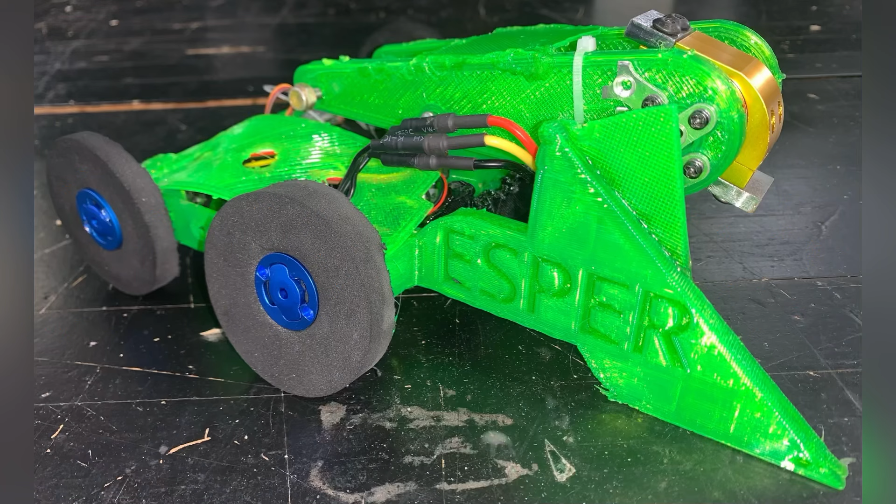Welcome to another episode of The Build Process, a series where I show you my process for building a combat robot from beginning to end. Today, we'll be rebuilding Esper, my 4-bar vertical spinner. Even though I've been building robots since 2018, Esper was my first time ever building a vertical spinner.

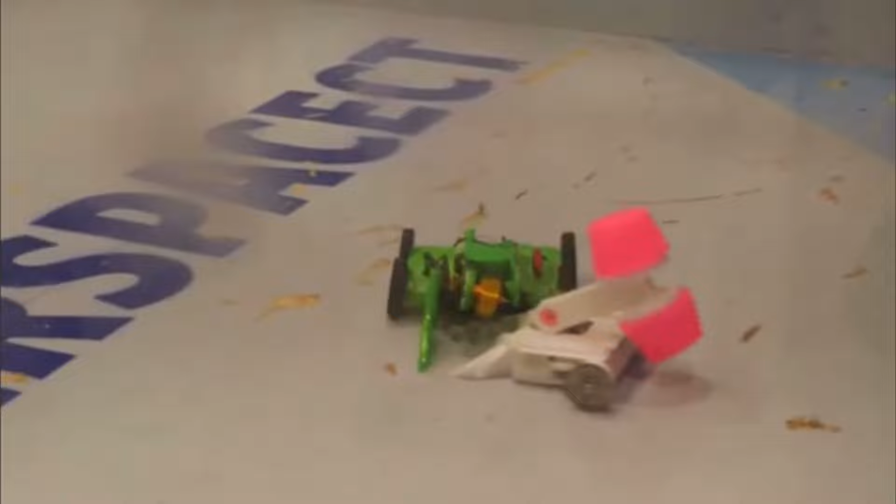For a long time, I actually avoided making vertical spinners because I was always more interested in making unique designs that went against the meta. However, after making so many other kinds of bots, I decided I was finally willing to make a vert as long as I could find a way to make it unique and stand out in comparison to other verts. And that's when I got the idea to put the vertical spinner on a 4-bar mechanism. I mostly did this because 4-bar lifters are one of my favorite types of robots, and I've also always been a fan of spinners that have their weapons on articulated arms.

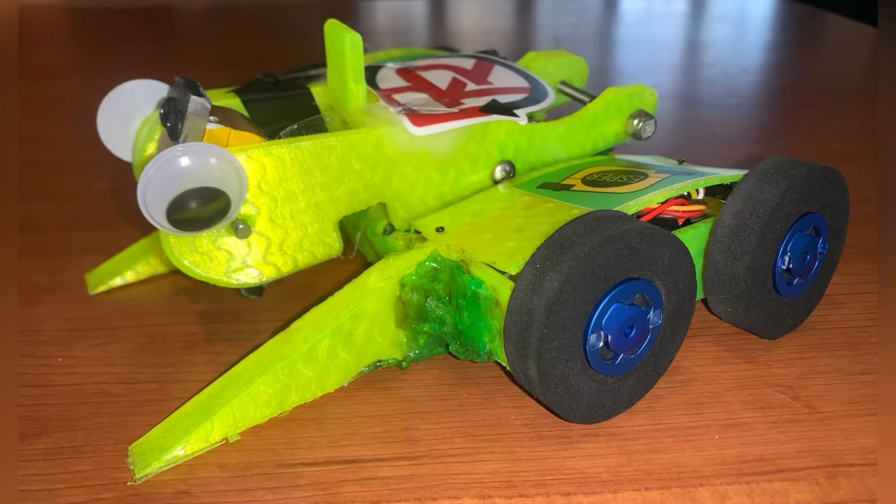Esper has competed at 2 competitions, but it's never really done that well and only has 1 win to its name. The first time Esper competed, it was held back by several design flaws, and the second time it competed, it ran into major problems with the electronics. Needless to say, there is a lot of room for improvement with Esper, and I really want to do everything I can to have this bot live up to its potential. Esper will be competing in T-Town Beatdown on August 3rd, and so it's time to redesign Esper so that it can be the best bot it can be.

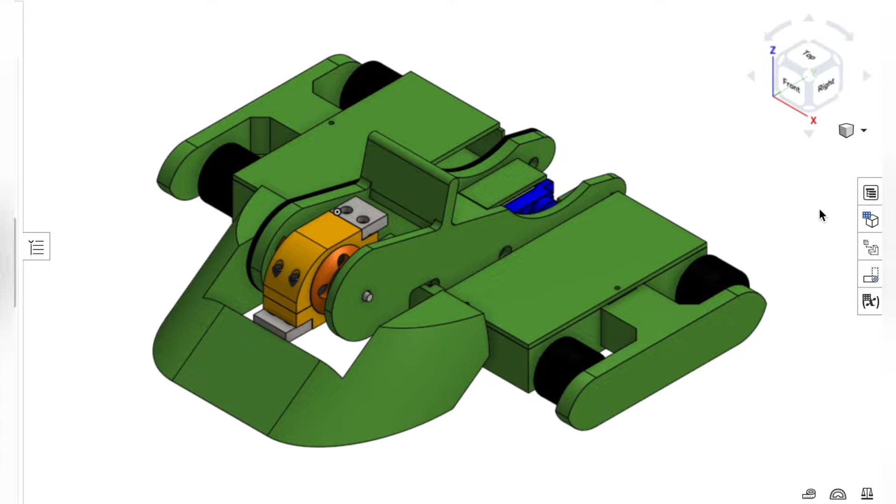Alright, so here we have the brand new version of Esper. So let's just go over everything one by one. So taking a look inside, we have the 2 top panels. So just hiding this. So they're just direct drive N20 motors from Turnabot. And yeah, these should be pretty good. I'm mostly switching these motors for weight.

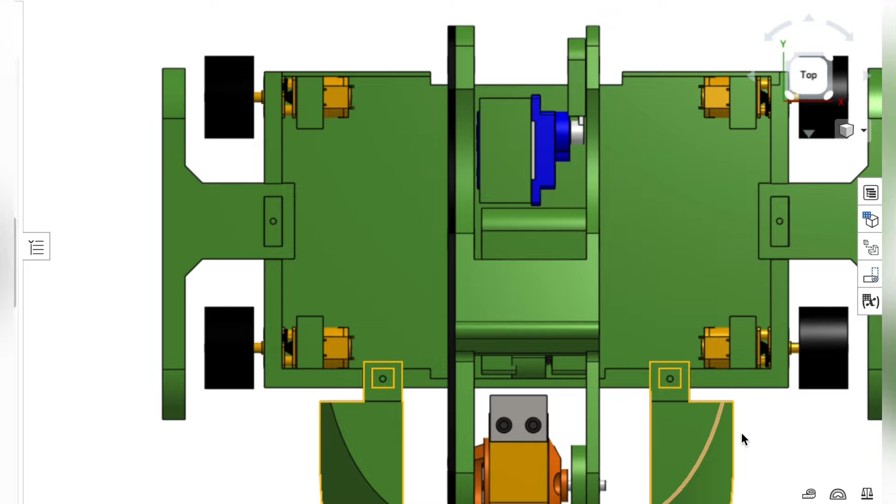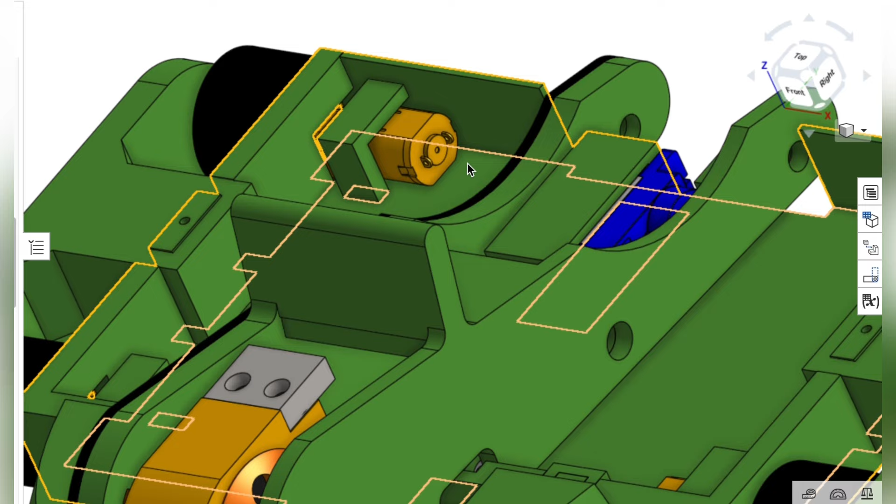I actually used N20 motors in the very first version of Esper, but those were like very basic N20s I bought off Amazon. I didn't really look at the specs for them that much. And Esper's drive power was just pretty bad. It was so slow, it could barely push anything. So yeah, those N20 motors were pretty terrible. So for the version of Esper after that, I actually switched to Silver Sparks, and they were fine, but they were way too heavy, so I didn't have a lot of weight for armor and so on.

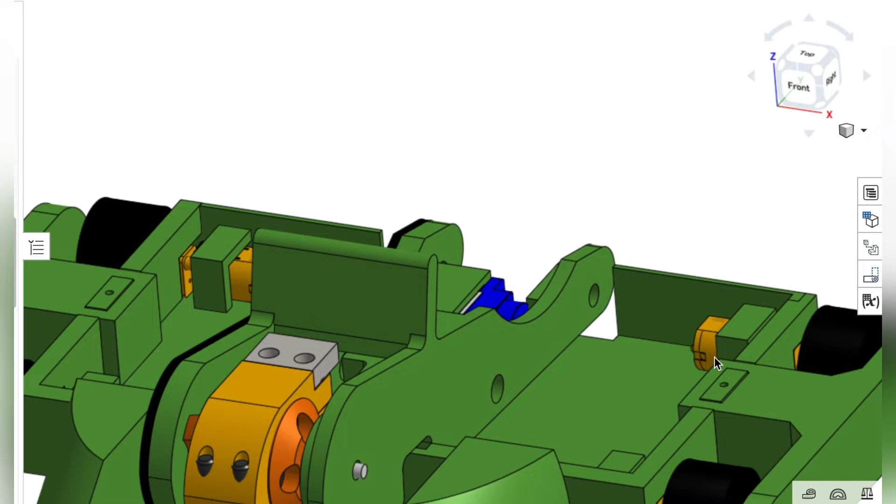But now I found a right balance. These are N20 motors that are very light, but unlike the first N20 motors that I got off Amazon, these ones from Turnabot have great RPM, and they're just higher quality in general. So I get good drive motors, and I get to save a bunch of weight, so this is a good mix.

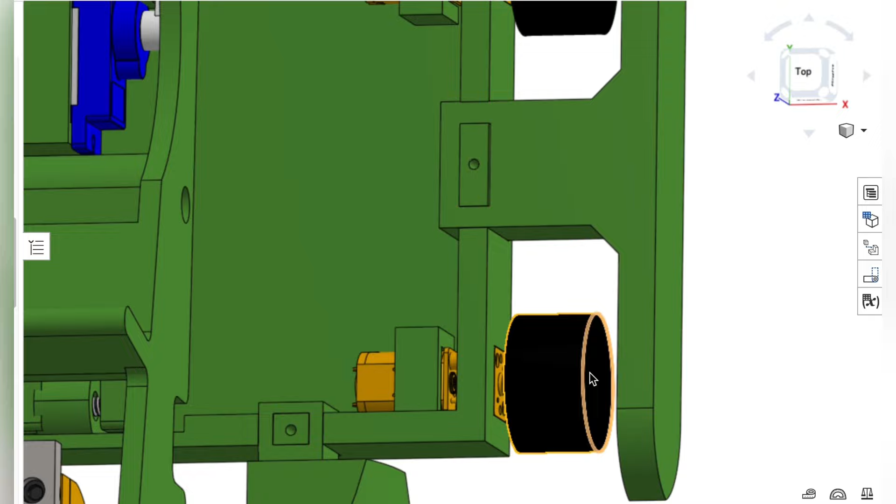You probably already noticed, now Esper actually has side guards. I kind of never tried side guards before because I didn't have the weight for it, and I also just didn't think it was really worth it, but I've kind of changed my tune since I think I have the weight for it, so I might as well try to protect the wheels, and I kind of have to because these are just going to be directly attached wheels. And if they get hit, they're coming off, and they will probably take the motor with them. So it's good to have some kind of protection.

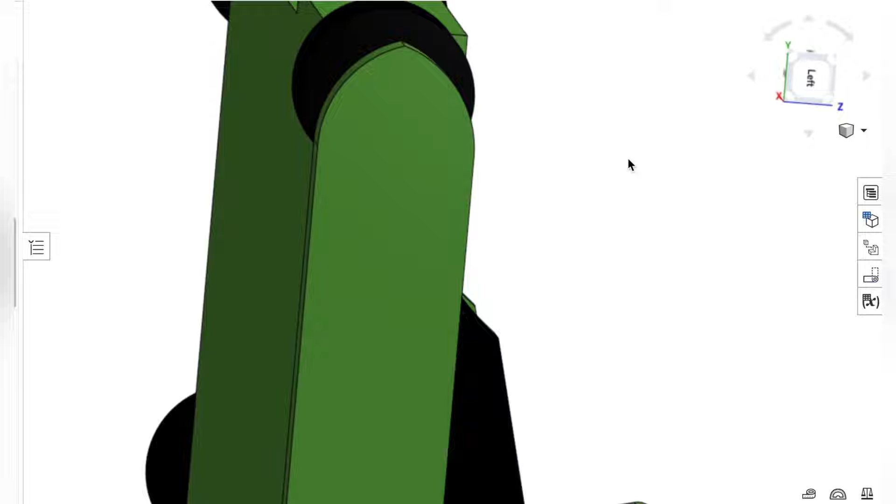So the way these side guards slot on is actually really cool. I've been using this kind of design method a lot. So we have this little block right here. And as you can see, the guard just fits right on there. And then it's also further held in with the top panel. So it just press fits in there. And the top panel also helps to hold it in place.

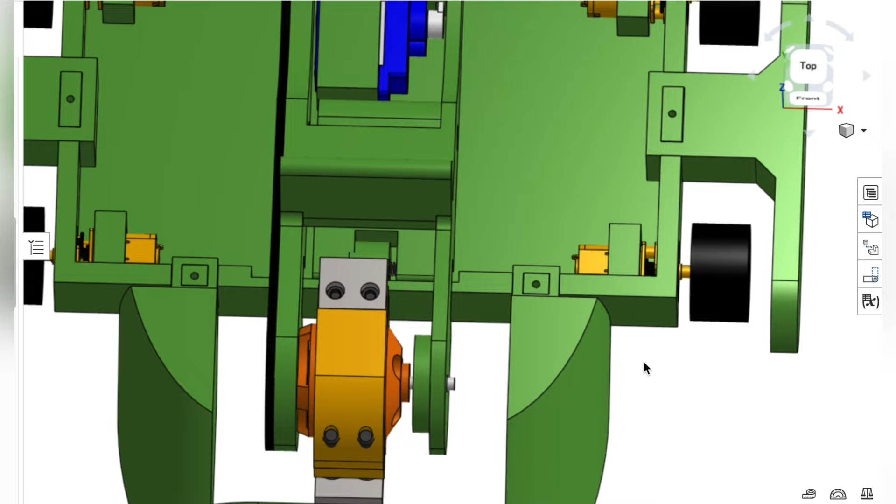And the same thing kind of applies to another thing I've added, which is a wedge. The wedge has the same kind of geometry where it just slots into these little blocks here.

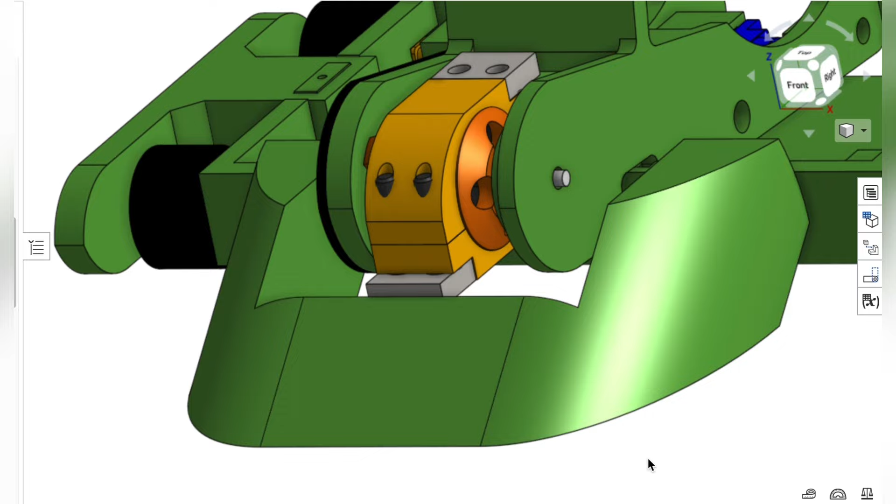And yeah, it should hold on relatively well. Talking more about the wedge itself, this is going to be a 100% infill wedge, because initially I thought about having a metal wedge, but I just don't think I have the weight for that. And I thought I might as well try TPU because I've heard that 100% TPU wedges can work sometimes. So I might as well try it here and see how it goes.

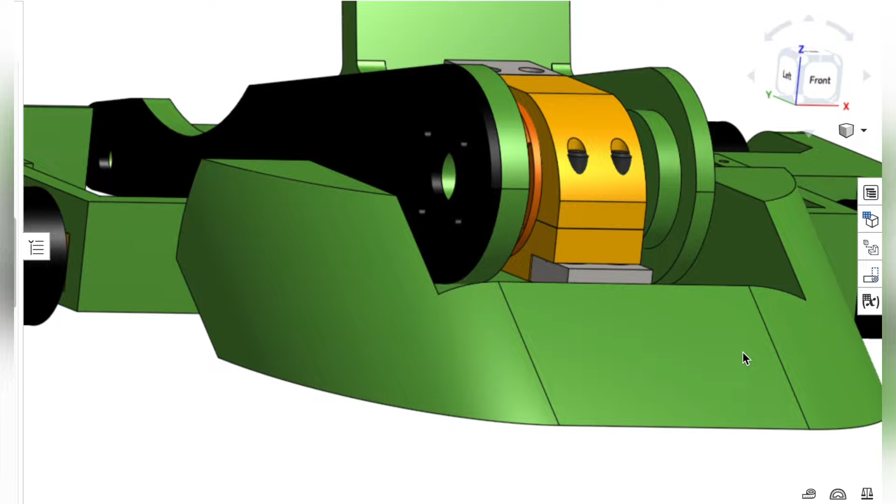I've designed it so that it can fend off horizontals, but I also want to try to be low to get underneath other stuff too. So hopefully that works out. So yeah, I really like the wedge, happy with the design, and hoping it just works as intended.

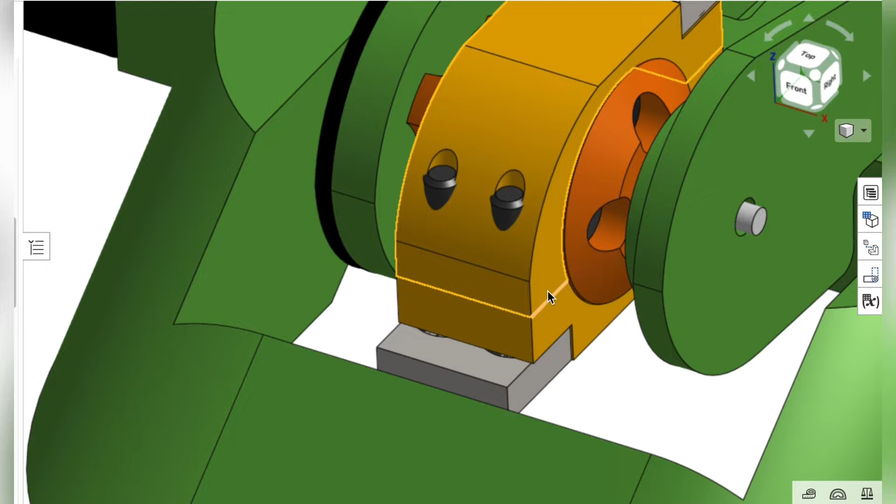Then of course we have the weapon, which is not a custom weapon. Again, I just don't really have the time or money to make my own custom weapon right now. So I'm just using the same FingerTech clamp drum I used in the first 2 versions of Esper. And it should work relatively well. It's not the best weapon out there, but it gets the job done.

The weapon motor is a very basic A2212 1000 kV motor, like what you get from Amazon. Again, it should work out.

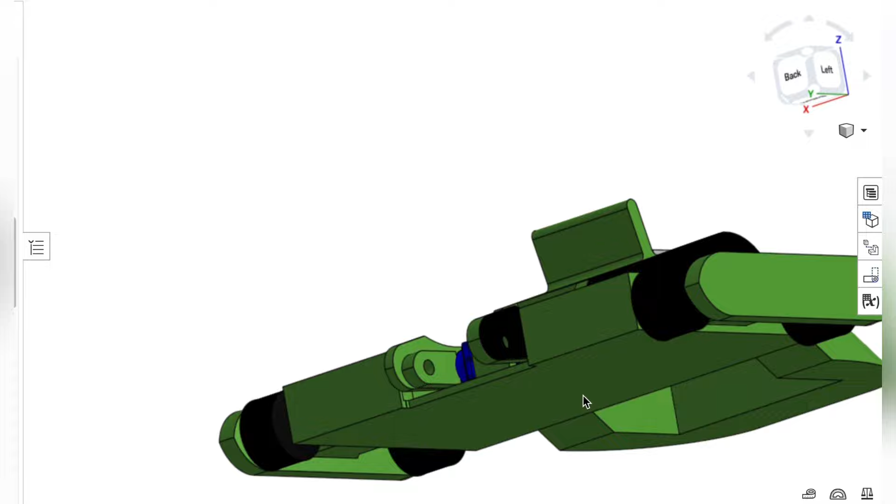The arm, so let's talk about the big thing here, the 4-bar. First of all, I want to say it was not easy to get the 4-bar to work in CAD. I had to learn a lot about how mates work, but I was able to get it to properly do the 4-bar thing, and I'm really proud of how it came out. So yeah, the whole assembly just moves out forwards on the 4-bar, and I'm really proud of how I was able to get it to work.

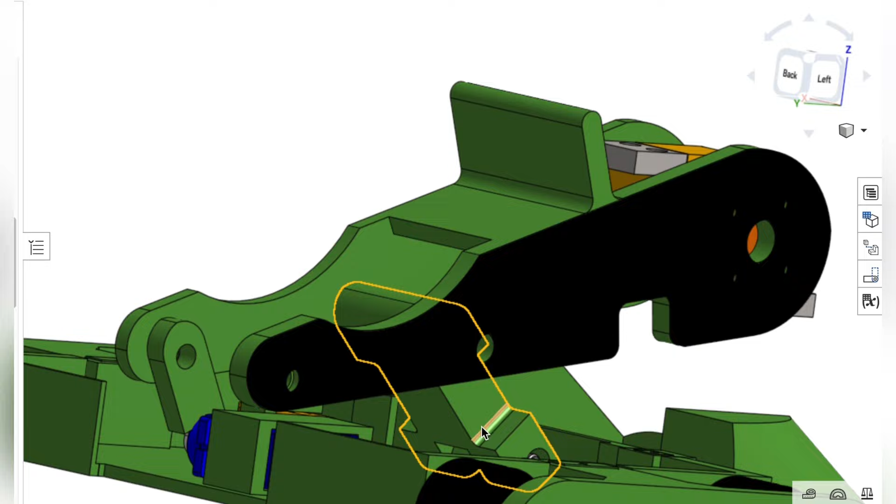Obviously, it's pretty simple when you actually think about it. This main link attaches here, and the other link attaches to this servo back here, which just allows the entire thing to move forwards and up, and I like it.

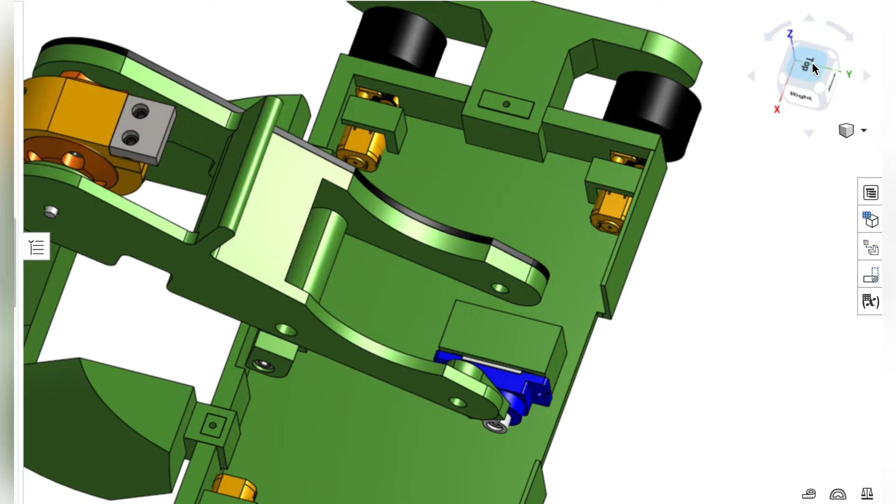As for the arm itself, the biggest thing I'm trying with this robot that I've never done before is it's actually going to have a carbon fiber part. I've never used carbon fiber on any of my robots before, but this black thing here is meant to reinforce the weapon arm, which is just one piece of TPU. The main reason for that is just to reduce flexibility. I don't want the weapon to flex too much.

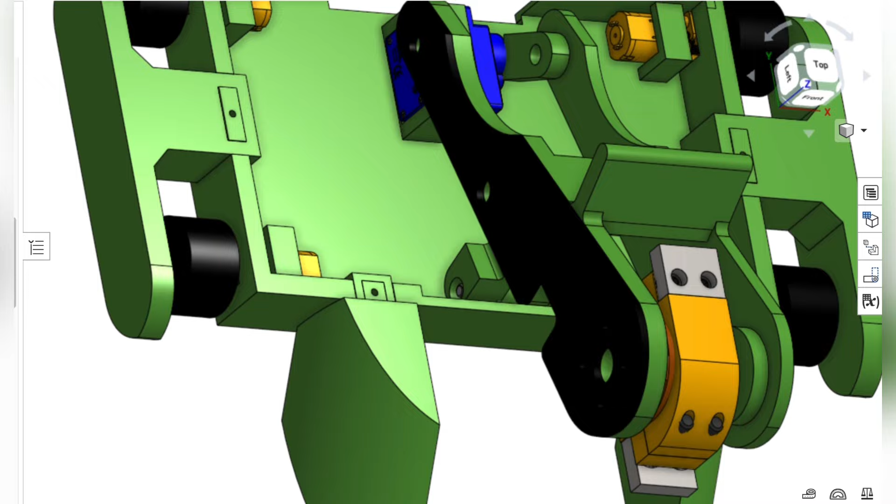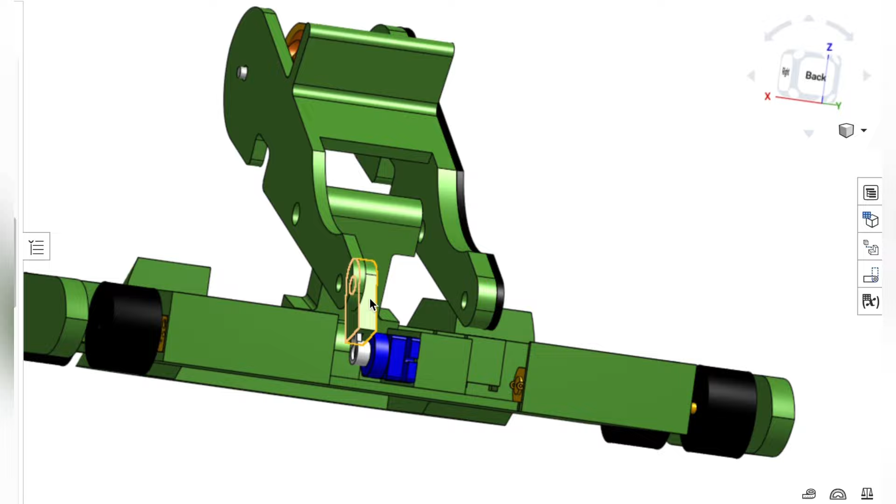So I'm just adding a very thin piece of carbon fiber. It's like 0.079 inches thick, and I'm going to get that from SendCutSend. I'm just going to attach it, and hopefully it should work out. So yeah, this is a new thing I'm trying. This is my first time using carbon fiber ever. So let's see how that goes.

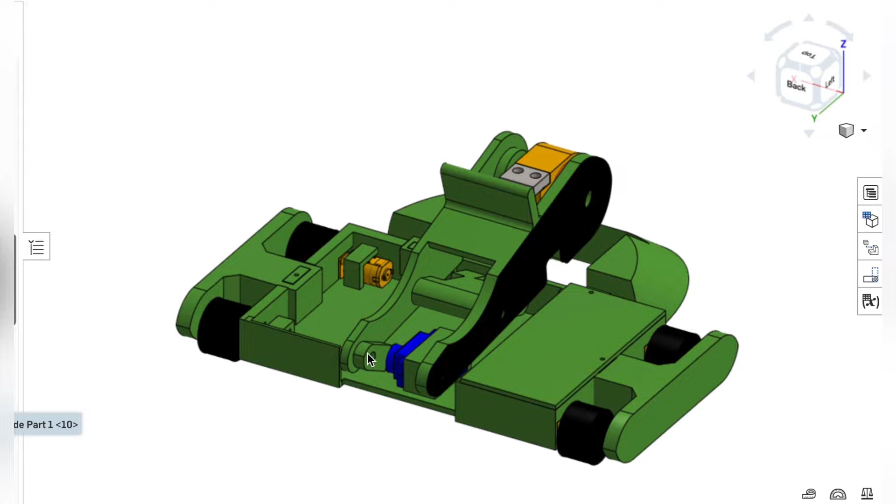Anyway, aside from that, I'm trying to think about what else I've changed. That should be mostly it. Again, I'm just really proud of how I got the 4-bar to work. It was not easy. But yeah, it just kind of rests in there, and it can just go out like that. So I guess that's mostly it for this brand new version of Esper. And let's get to building it.

All right, let's take a look at the parts we'll be using for Esper. Real quick, if you hear anything in the background, that's just my 3D printer printing some stuff. So that's what that is if you're curious about it.

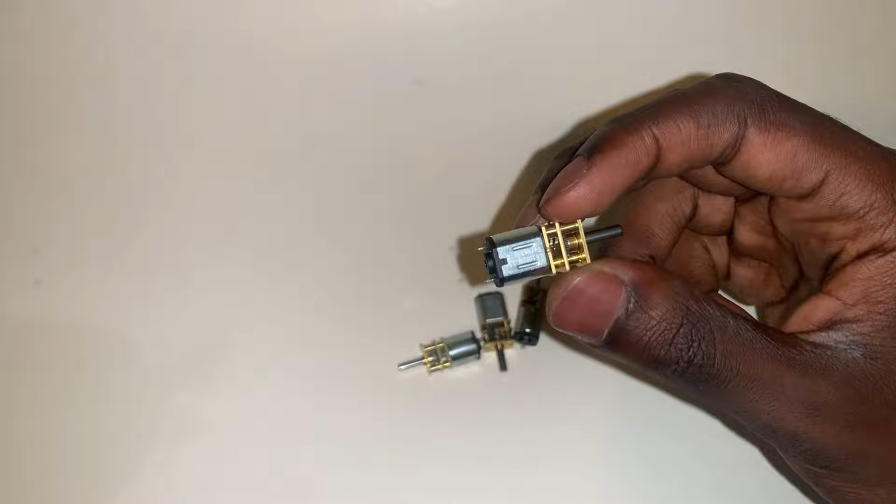Anyway, let's take a look at the parts. Of course, we have the 4 drive motors. These are just some N10 drive motors from Turnabot. I used these in the latest version of Flaky Boy, and I like how they run. They're pretty nice, so I'm gonna use them here for Esper.

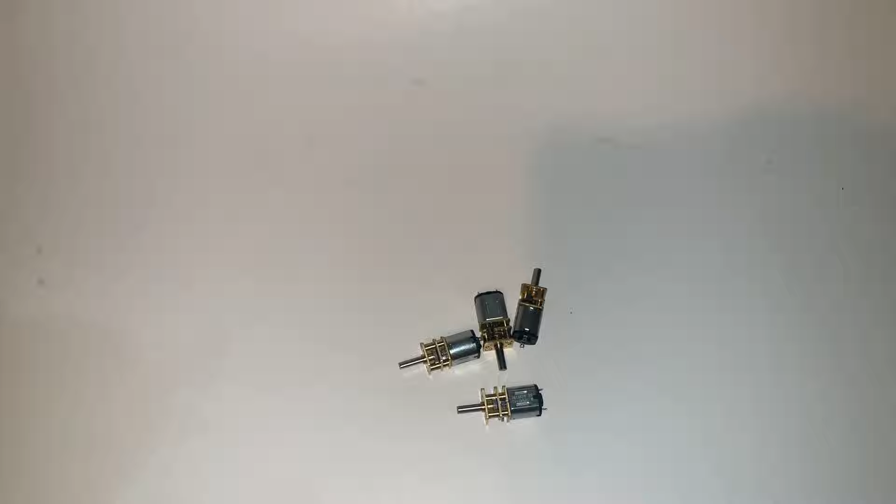Of course, we need some wheels to go on those motors. So here are the wheels. I just dropped one. They're also just Turnabot wheels. Very grippy, they have the little Lego tires, and they're pretty great.

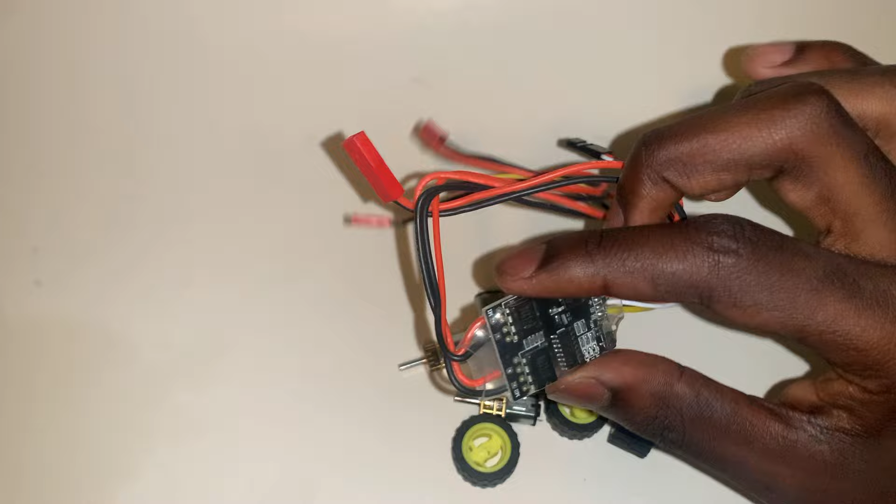Then we have our drive ESC that we'll be using, just a standard dual brushed drive ESC. Of course, we also need our weapon motor for the spinner. That's what we'll be using here, just a standard A2212 1000 kV motor.

Then we need the ESC for that motor. So we got a brushless reversible ESC from FingerTech Robotics. To put onto the motor is our weapon.

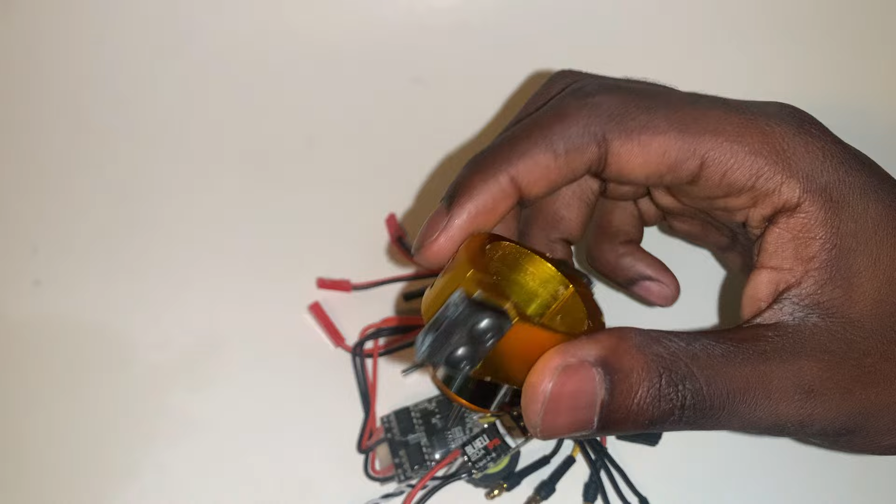So this is the FingerTech clamp drum. This is what I've been using on Esper. In fact, as you can tell, this is the exact one that I've used on Esper the last 2 times. I'm gonna get another one since this one's teeth are slightly worn out, but it's still very usable, still good as a spare. And until we get the new one, this is what we'll be using in place of it. So yeah, this is the clamp drum. Many Antweights use them. And yeah, it's a pretty decent weapon.

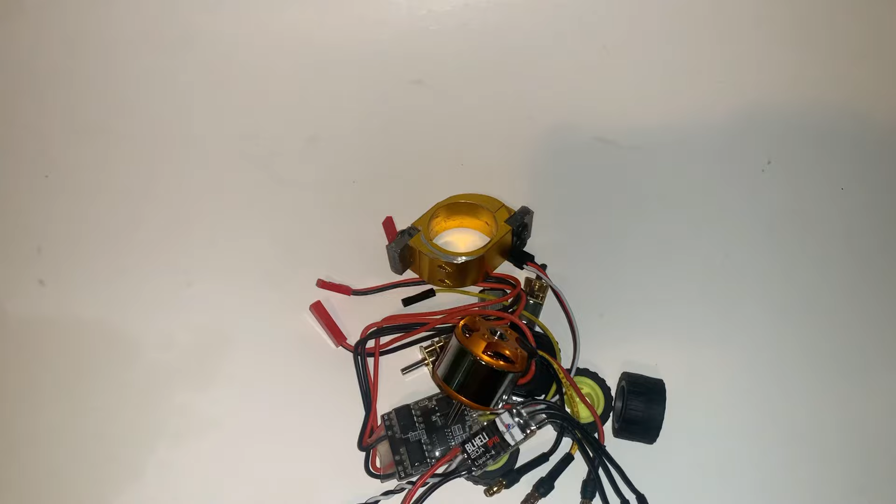Of course, we also need the servo to move the arm. So here this is, it's a Metal Gear micro servo. Again, this is the exact servo I used in Esper the last 2 times. And yeah, it's a pretty nice servo. Like I said, it has metal gears, so hopefully it can handle more of the shock from the spinner hitting stuff. So hopefully nothing happens to the servo. And yeah, that's what we'll be using there.

Then of course we need our BEC, our 5-volt regulator. So that's this. For the battery, I got a 3S 11.1 volt, 450 milliamp hour LiPo battery from Palm Beach Robotics. I really like their batteries because their 3S batteries are really small and dense, and it saves a lot of weight. So I really like these batteries for Antweights.

And lastly, our receiver. So as you can see, we got a lot of stuff here. Everything that's not currently here is the stuff that we'll be printing, like the weapon bracket and the main body and so on. So these are pretty much all the non 3D printed stuff we'll be using. And yeah, it looks like a big mess, but we're gonna get all that together. And yeah, let's see how that goes.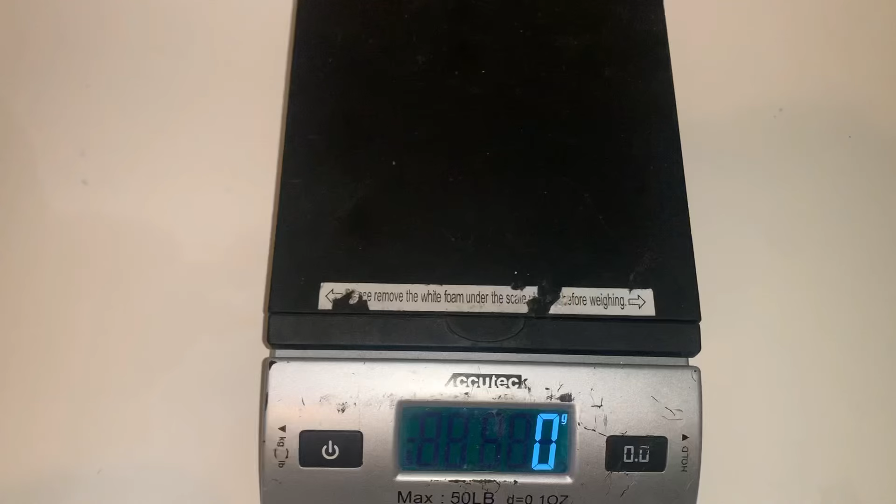Okay, so now we're gonna go ahead and weigh everything. As always, it's important just to make sure we're on the right track to be within the weight limit. So let's weigh what we have so far and see where we're at. So first the wheels, the battery, just putting everything here. And that's about everything. So we're at 224 grams.

And of course, as an Antweight, which can weigh 1 pound, that's 454 grams. So we have about 230 grams left, give or take. And I think that should be enough for all the TPU stuff. So yeah, hopefully the bot will be within weight and nothing goes horribly wrong.

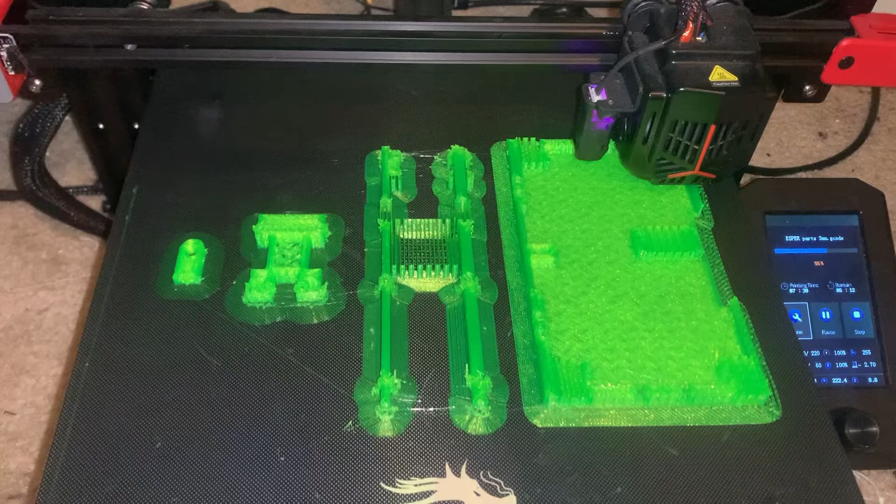All right, so as you can see, we started printing our first set of parts. I'm actually not printing everything all at once, just what's absolutely necessary first so that I can begin testing. So I have the main body so that I can test the drive modes properly, and I have the weapon arm and its linkages so I can test that. And after that, we'll print the other stuff like the forks, side guards, and top panels and so on. But for now, we're just printing the most important stuff first, so that we can start testing things quicker. So yeah, here's what we got so far.

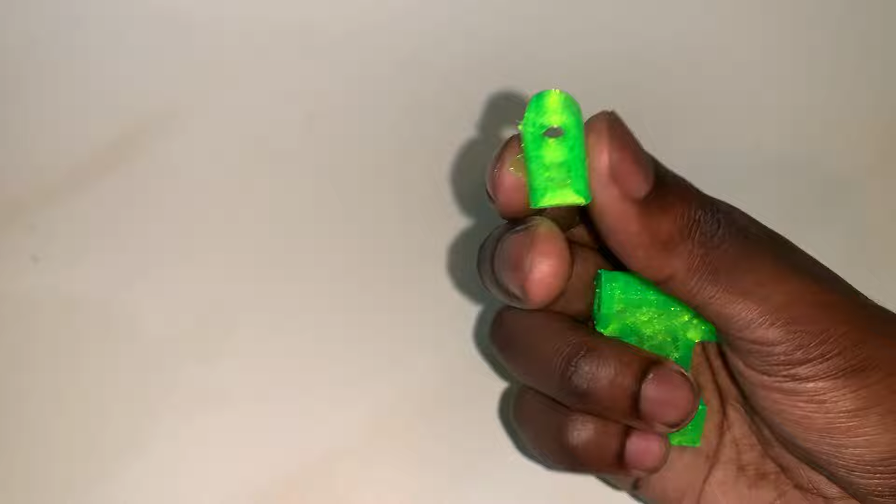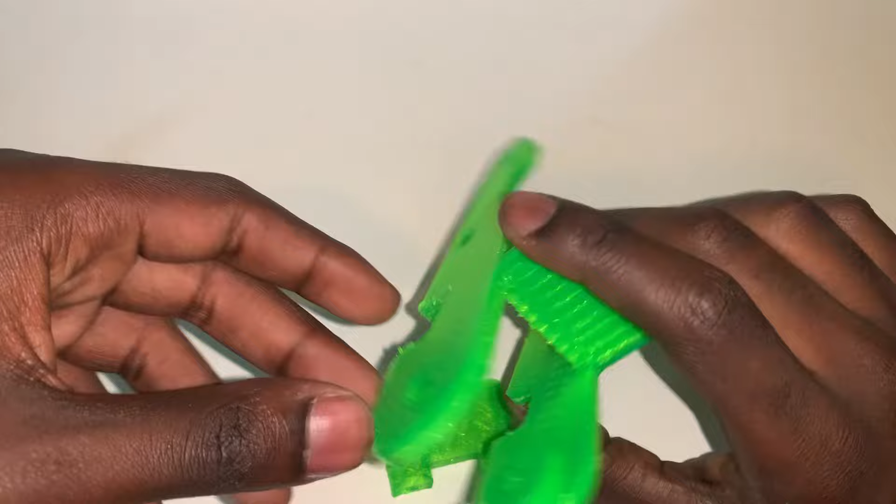All right, we got our first batch of parts printed, so let's take a look at them now. First off, we have the parts for the weapon arm. We have this link. This link is for the servo. Then we have the main link in the middle of everything. And of course, we have the main weapon arm. This is where the weapon motor attaches to. And as mentioned before, we're going to have a carbon fiber brace on this side to better reinforce it so it's less floppy. But aside from that, the part is looking pretty good.

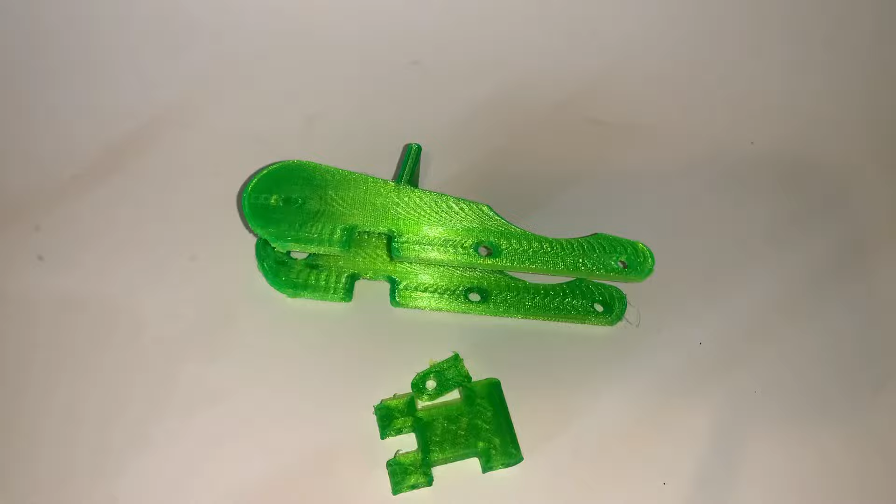And so then we have the biggest thing so far, the main body. And as you can see, I actually have the wedge already attached. So originally the wedge was just going to slide onto these little tabs. But when I was test fitting it off screen, one of the tabs actually broke and the other one was really flimsy.

And so I decided to just go ahead and take a soldering iron and permanently melt the wedge to the main body, since realistically, there's no reason I'd have to take the wedge off anyways. So now the wedge and the body are just one solid piece. Speaking of solid, I don't know if I already mentioned this, the wedge is 100% infill, so it should be good against spinners, especially horizontals. And everything else is about 10% infill with 3mm walls.

So yeah, that's what we got so far. We still got some other stuff to print, but at least now that we have this, we can quickly test some stuff we couldn't test before. So let's get to it.

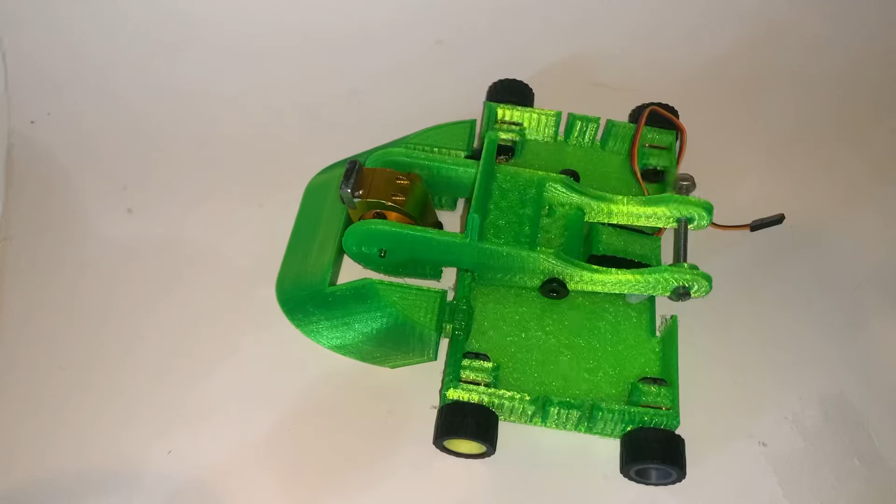All right, so just using what we have so far, we've made a basic assembly of the bot. We added the servo right about here. Here's the linkage. And the 4-bar should work as intended. I still got to put power to it to make sure everything works properly. We have the weapon attached. And so just looking at it, just fiddling around with it.

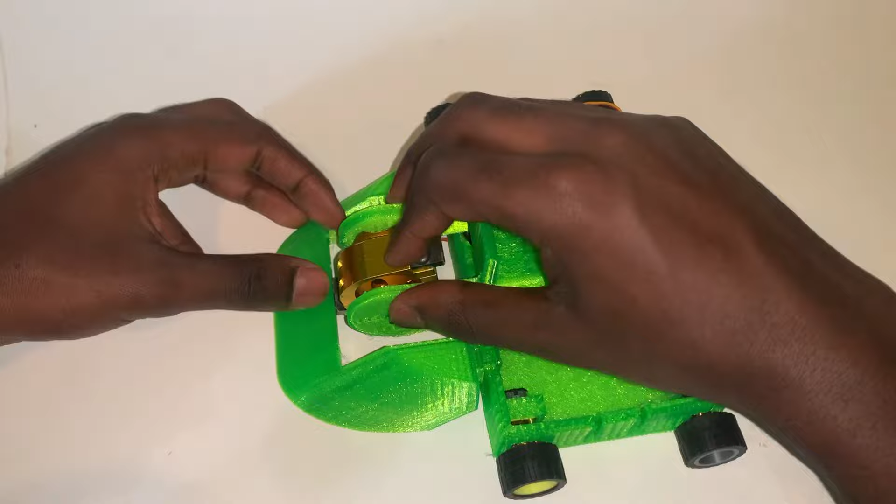One big thing I've noticed is that the weapon actually contacts with the wedge, which is bad. So I think I'm going to have to take a soldering iron and grind this down a little bit so that there's more clearance for the weapon. And also, I think the weapon slightly touches the ground, so I'm going to have to deal with that.

Also, speaking of the ground, turning the robot over, I want the back wheels to touch the ground, but I think they just barely miss it, so I might need to cut off a little bit of this edge here to make sure the back wheels do touch the ground when upside down. So that's why I put this together now, so I understand stuff I need to change ahead of time. But aside from that, the robot looks all right. So let's continue forward. Let's start soldering some electronics together.

Okay, so we got all the electronics put into the robot. We got everything soldered together, so that's nice. We're just gonna do a quick little test to make sure everything's fine. First, we're gonna spin up the weapon motor. Obviously, I've taken off the weapon for safety reasons. Okay, that seems to spin fine.

Okay, now we're gonna do the arm. You see the servo has a little bit of a kick to it, so that's nice. And now the drive motors. Okay. So far, everything seems fine. So I think we can go from here.

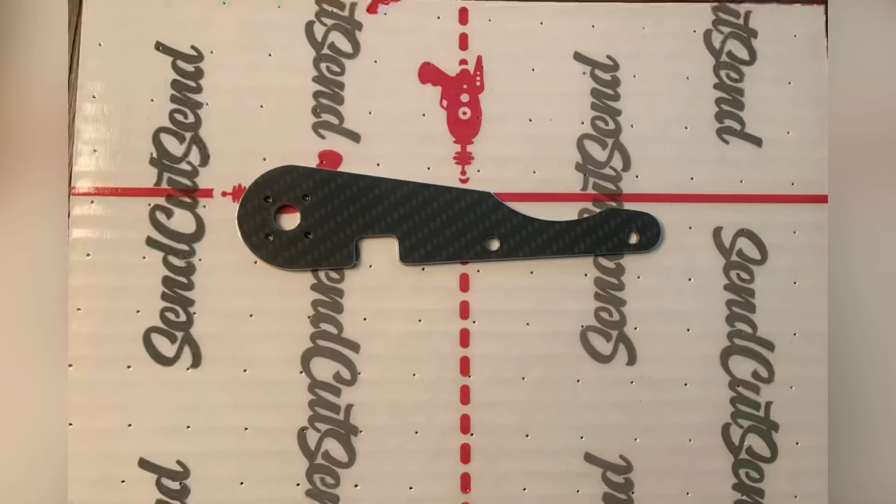Okay, so good news. My SendCutSend order just came in. So here is the carbon fiber side that's gonna reinforce the spinning arm. Looks pretty nice, pretty clean. I love this. Fun fact, this is my first time ever ordering anything from SendCutSend. It's also my first time having machined parts in general. And I like how it came out. Pretty cool, pretty neat.

All right, the bot is mostly done. We've added everything we didn't have before. As you can see, I've added the top panels and the side guards. Both are printed at 10% infill with 1mm walls. We're gonna weigh the bot later, and if we have weight, we can thicken that up, maybe add more walls. But for now, this is what we got.

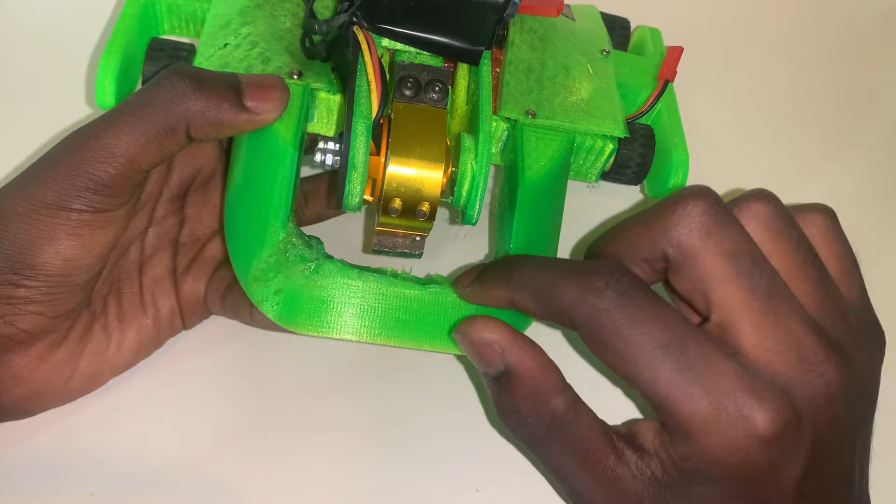Like I said I was gonna do, for the wedge, I took a soldering iron and ground down the edge of the wedge so that the weapon has full clearance and doesn't contact the wedge anymore. And speaking of the weapon, we have the carbon fiber support here, to make sure there's no real flexibility, so that the weapon doesn't destroy itself. The weapon is a lot more rigid now, so I'm happy with that.

And the rod doesn't look that clean, honestly. The wires to the motor kind of just go out here and they're taped here. I wasn't really sure of a better way to do that. Yes, the ESC is right here, but it should be fine, I guess. But overall, I'm relatively happy with how the bot has come out. So let's go ahead and weigh it and see if there's anything else we need to do.

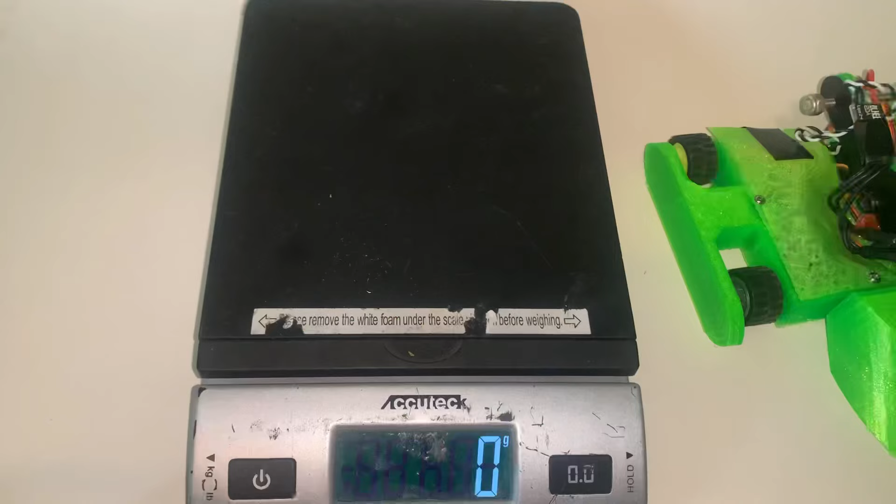All right, it's time for the moment of truth. Let's put Esper on the scale and see how much it weighs. Let's do this.

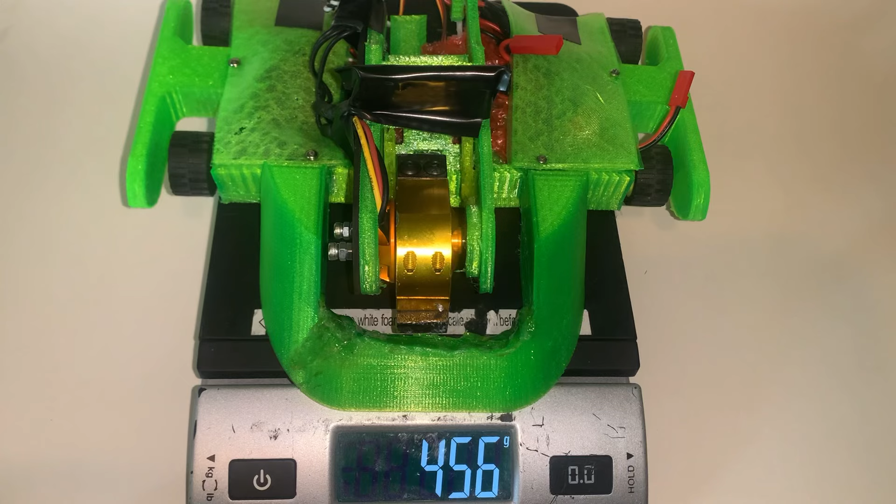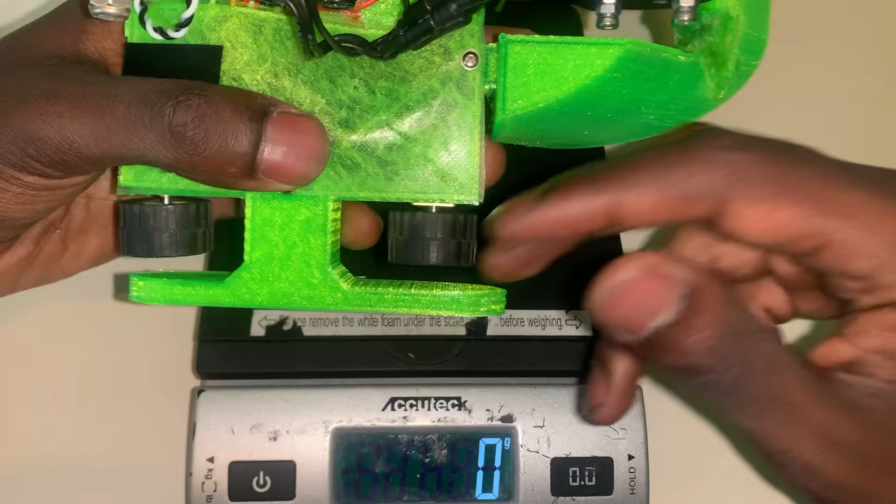Okay, we seem to be about 2 grams overweight, which isn't that bad. We can definitely fix that. So just looking at the bot, immediately my first thought is maybe we could cut off a little bit of the side guards, like these little bits right here, because they don't seem to be that necessary. So I think if we cut that off, we might be fine. So we're gonna go ahead and do that and see if that fixes the problem. If not, we can try to remove some other small stuff.

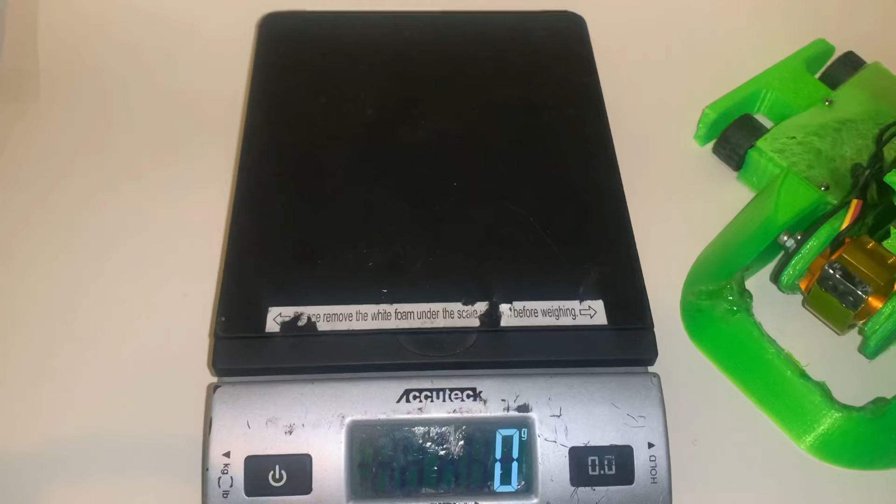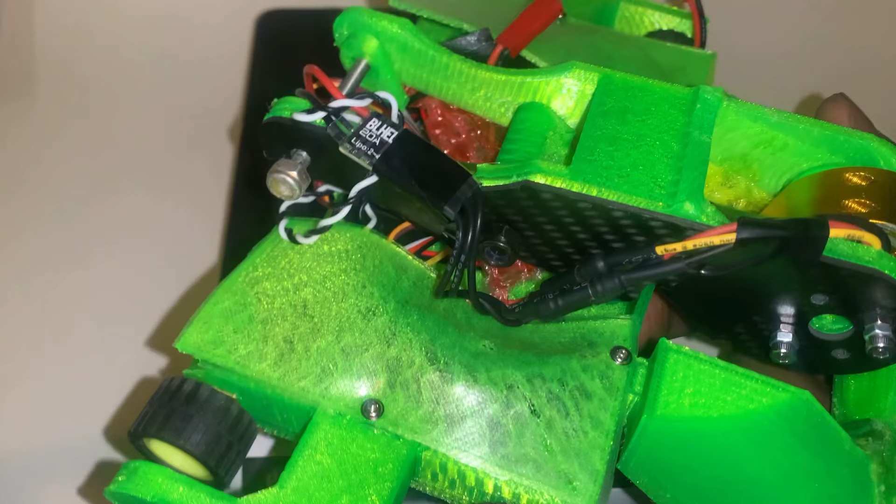All right, so like I said I was gonna do, I went ahead and cut off the little edges of the side guards in order to save weight. I also cut off the little thing that stuck out from the top of the weapon arm. Originally, the idea was that that little thing would brace against the ground when the robot's upside down, so that the back wheels could touch the ground and the robot could drive while inverted.

However, I just couldn't get the angle to work, and I just couldn't get the back wheels to touch the ground like I wanted to. So instead, I've just cut it off entirely to save weight. And now the idea is to just try to self-right using the weapon. So hopefully that works out. But in the meantime, let's see if the robot is within weight now. So let's go ahead and weigh this thing.

Okay, we're at 450 grams. We're actually 4 grams underweight. So yeah, it worked. Esper is officially within weight now, so that's good.

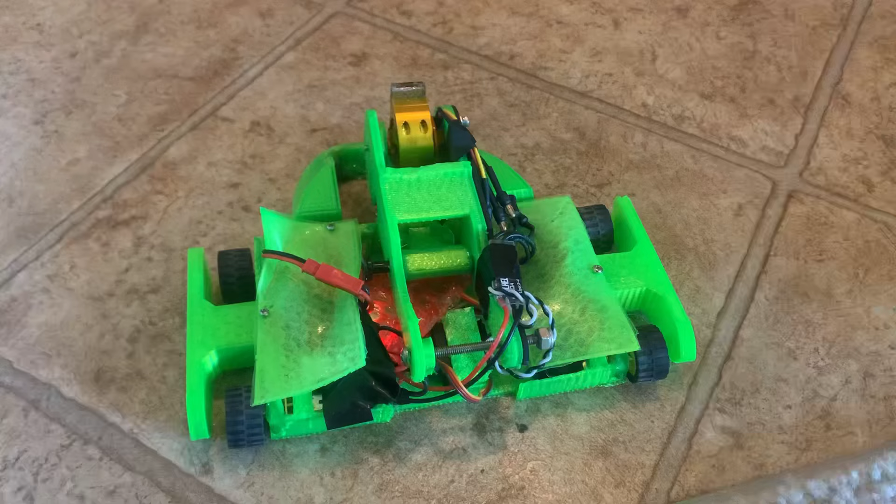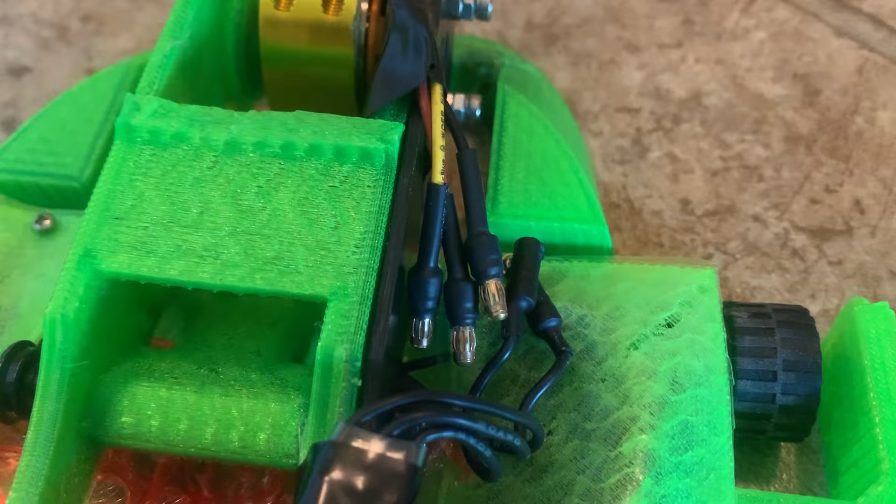All right, so now that we know the robot is within weight, I think now's a good time to do another little test. This time I've attached the weapon, but I've unplugged the weapon motor for safety reasons, obviously, so it's not gonna be spinning up at all. I've attached the weapon just so that I can see how the robot acts with the physical weapon on because of its weight, just making sure everything's fine there. So yeah, let's go ahead and test this out.

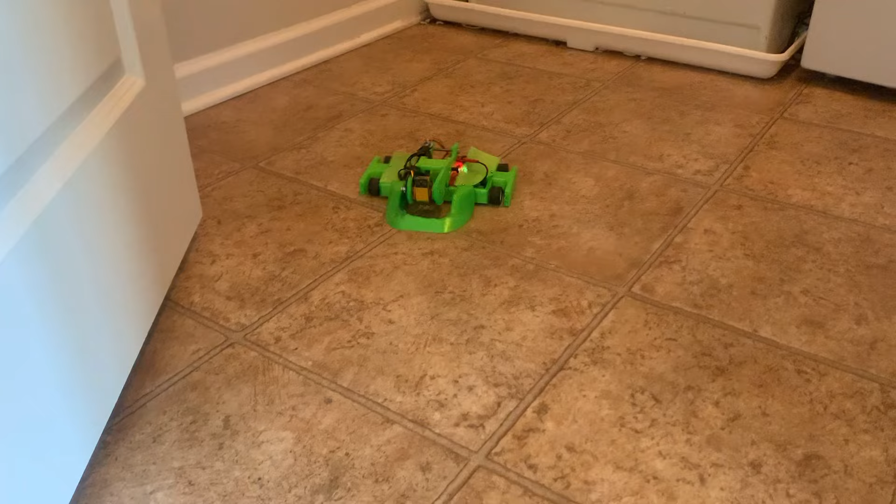So first we're gonna do a little 4-bar. All right, that's nice, a closer look here. Okay. Now we're gonna drive this. Okay. This is nice. I want to say immediately, this is the best driving Esper's ever had. The last two robots didn't drive that well. So this is immediately an improvement. Okay, I'm liking this.

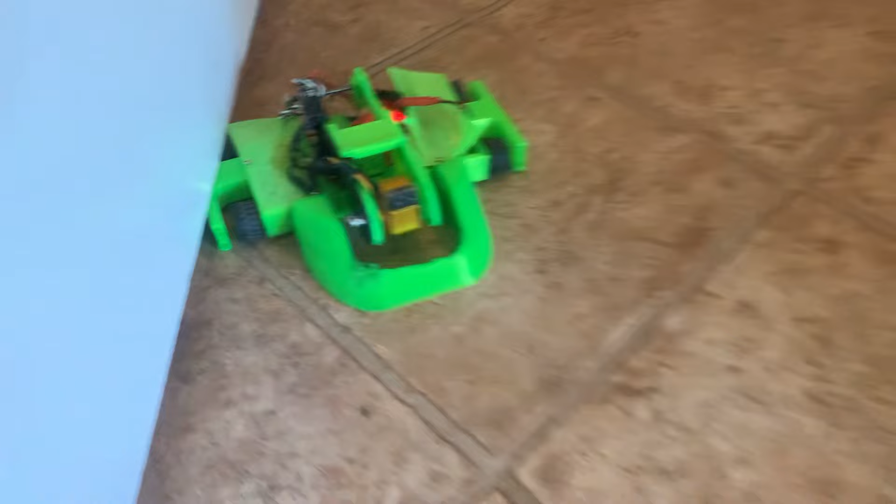So yeah, Esper drives pretty well. I'm pretty happy with this. This is nice. This is great. Oh, I'm stuck underneath the door. I think that's a good place to stop. Esper loses to the door.

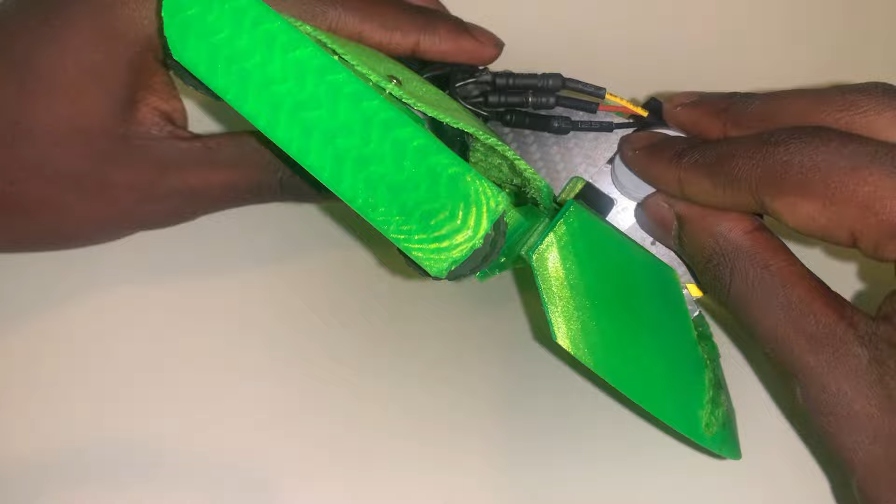And just like that, Esper is about 99% done. But there's still one last thing we need to do to really bring the robot to life. We gotta give it some googly eyes. So first, I'm gonna put one right about here. Okay. Then gonna put one right about here. And there you go. Esper is officially alive. He is a happy little robot.

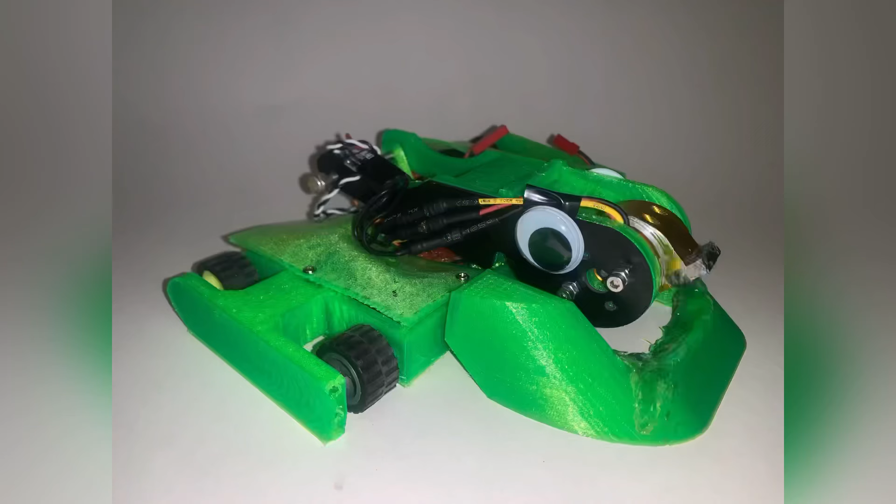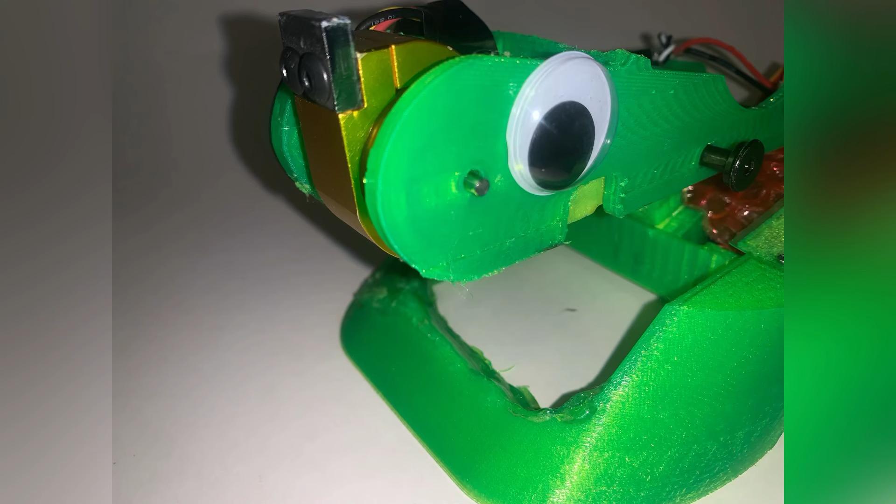There you go. And that marks the end of this video. I'm honestly really happy with how the bot turned out. The last two versions of Esper were fine, but this new version of the bot is simply a massive improvement in every way, and I'm proud to have seen the robot grow over time. I really feel like a 4-bar vertical spinner has the potential to put on some entertaining and interesting fights, and I'm hoping to do exactly that with this new version of Esper.

With Flaky Boy, Bird Strike, and now Esper all done, there's only one more bot I need to rebuild for T-Town Beatdown. I'll see you on the next episode of the build process, where I'll be putting the power of friendship back together.